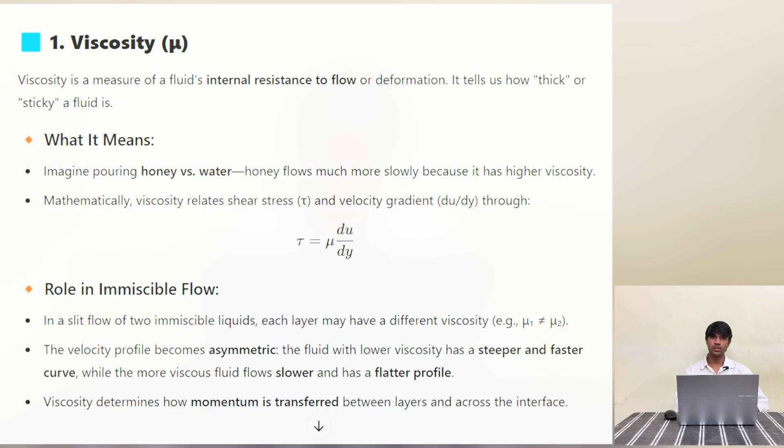So our second property is density. Density is the mass per unit volume of a fluid and plays a vital role in gravitational stability, pressure distribution and buoyancy. What does it mean? A denser fluid, mercury for example, contains more mass per unit volume compared to a lighter fluid, that is ethanol. It is a key factor in pressure variation with depth. P equals rho g h, where rho is the density of the fluid.

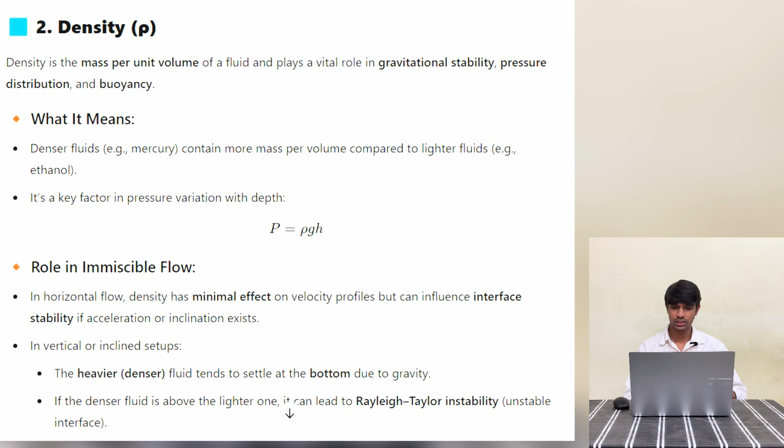Role in immiscible flow: in horizontal flow, density has a minimal effect on the velocity profile but can influence interface stability if acceleration or inclination exists. In a vertical or inclined setup, the heavier, denser fluid tends to settle at the bottom due to gravity. If the denser fluid is above the lighter one, it can lead to Rayleigh-Taylor instability, an unstable interface. Density differences are also key in phase separation and stratification.

Our third property is interfacial tension. Interfacial tension is a force per unit length that exists at the boundary between two immiscible fluids due to differences in molecular interaction. What does it mean? Just like surface tension at a liquid-air interface, interfacial tension exists at a liquid-liquid interface. It arises because molecules in each liquid prefer to stay with their own kind, causing a tension at the boundary. In immiscible fluids it helps maintain a sharp and smooth interface between two liquids. High interfacial tension resists mixing and deformation. Low interfacial tension allows more interface movement.

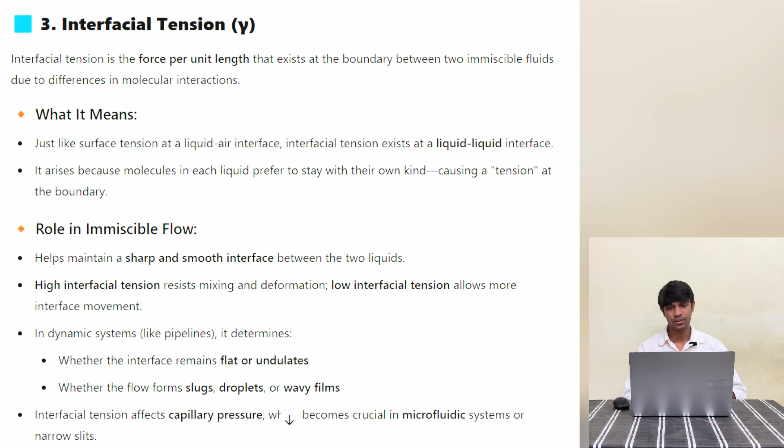In dynamic systems like pipelines, it determines whether the interface remains flat or undulates, whether the flow forms slugs, droplets, or wavy films. Interfacial tension affects capillary pressure, which becomes crucial in microfluidic systems or narrow slits. Our fourth property is miscibility versus immiscibility. This explains why some liquids mix while others do not, a key to understanding immiscible flow.

Miscibility: two liquids are miscible if they mix in all proportions to form a single homogeneous phase, that is ethanol and water. Molecular attraction between different species is strong enough to keep them together. Immiscibility: two liquids are immiscible if they do not mix and separate into two distinct phases, that is oil and water. This is caused by differences in polarity. Water is polar, oil is non-polar, no interaction, no attraction. The interface remains distinct with each liquid retaining its own properties.

Role in flow: immiscible fluids do not chemically interact, but they do mechanically. Momentum transfer happens via interfacial shear. Interface behavior is crucial. It can slip, deform, or remain stable. It determines how energy is distributed between layers. Understanding miscibility is important in designing separators, extractors, and two-phase reactors.

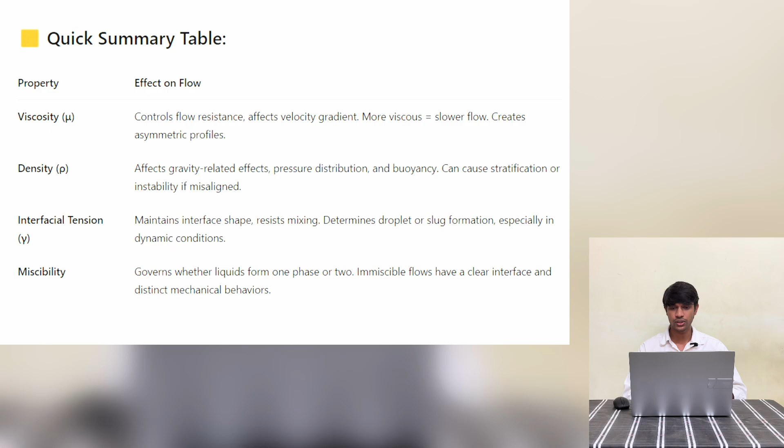So now let us summarize all this. Viscosity controls the flow resistance and velocity gradient; more viscous means slower flow, creating an asymmetric profile. Density affects gravity-related effects, pressure distribution and buoyancy, and can cause stratification and instability. Interfacial tension maintains interface shape, resists mixing, and determines droplet or slug formation, especially in dynamic conditions. Miscibility governs whether liquids form one phase or two; immiscible flows have a clear interface and distinct mechanical behavior.

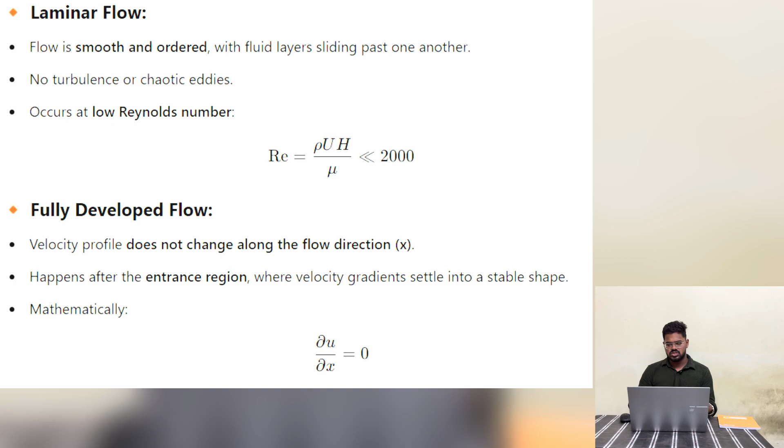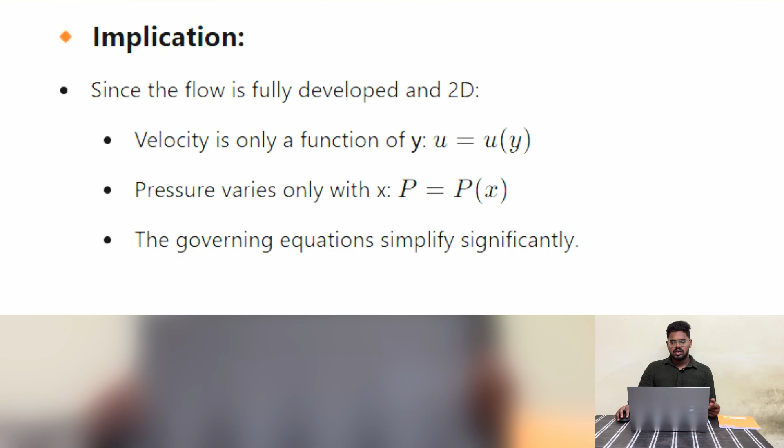Laminar flow: flow is smooth and ordered, with fluid layers sliding past one another. No turbulence or chaotic eddies occur at low Reynolds number. Reynolds number is rho u h over mu, which is less than 2000. Fully developed flow: the velocity profile does not change along the flow direction, x; this happens after the entrance region where the velocity gradient settles into a stable shape. Mathematically, del u by del x equals 0. Implications: since the flow is fully developed and 2D, velocity is only a function of y. u is a function of y. Pressure varies only with x. The governing equations simplify significantly.

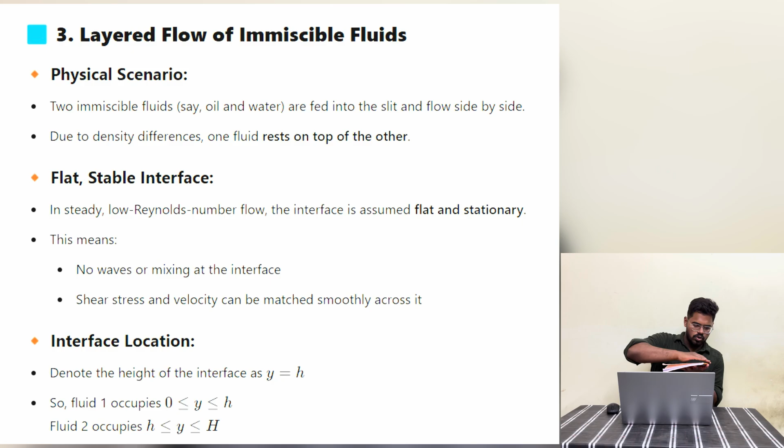Layered flow of immiscible liquid. Physical scenario: two immiscible liquids, say oil and water, are fed into the slit and flow side by side. For example, this is the plate, this is the thickness of the slit. So the oil and the water will flow in this direction, and they are flowing through this thickness towards the direction of this length.

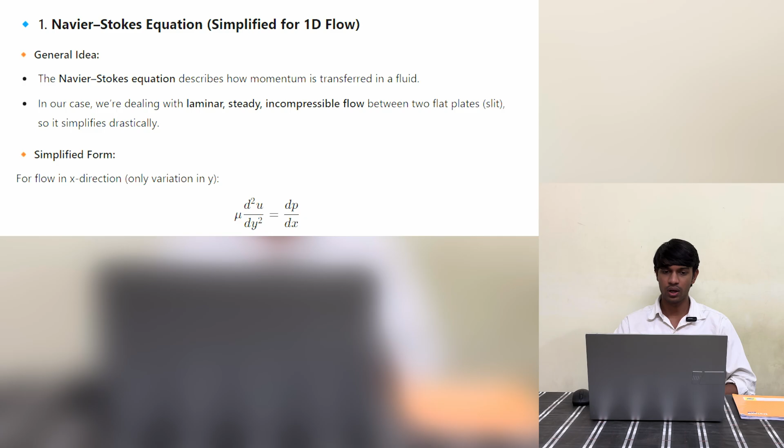In steady low Reynolds number flow, the interface is assumed flat and stationary. This means no waves or mixing at the interface. Shear stress and velocity can be matched smoothly across it. Now we will discuss the equation of motion. These equations are fundamental in transport phenomena. The first is the Navier-Stokes equation. The Navier-Stokes equation governs fluid motion, accounting for forces like pressure and viscosity. For our case, we simplify it using assumptions.

The first assumption is steady flow. Steady flow means there is no change in property of fluid with respect to time. The second assumption is laminar. The flow should be laminar: flow is smooth, there is no turbulence in the flow. The third assumption is fully developed. It means the velocity profile doesn't change in x direction. It means du by dx equals 0.

The fourth assumption is 2D slit. It means the variation is only in the y direction. And the fifth assumption is the fluid should be incompressible. Incompressible means constant density. What is the Navier-Stokes equation? The simplified equation is mu d²u by dy² equals dp by dx, where u is velocity in x direction, mu is dynamic viscosity, and dp by dx is a pressure gradient that drives the flow.

We can apply the Navier-Stokes equation in both fluids, the heavier fluid which is at the bottom, and the lighter fluid which is in the top layer. So it should be mu1 d²u1 by dy² equals dp by dx, and mu2 d²u2 by dy² equals dp by dx.

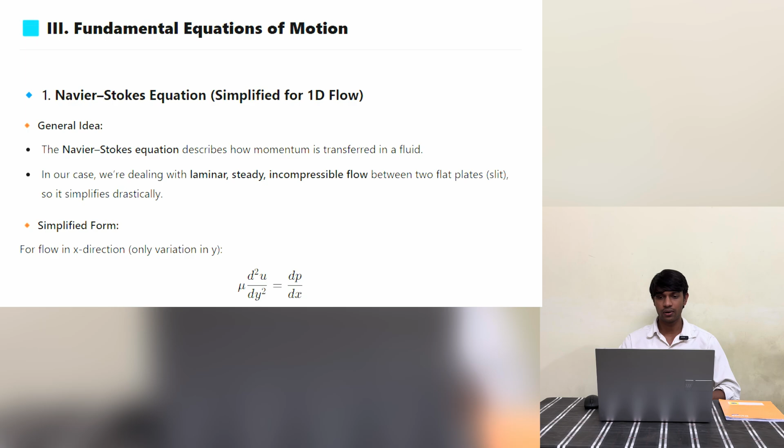Our second equation is the continuity equation. The continuity equation ensures mass is conserved in the flow. For an incompressible 2D flow, du by dx plus dv by dy equals 0. Simplification: since flow is fully developed, du by dx equals 0. So dv by dy equals 0, so v equals constant. What is the physical meaning of that continuity equation? In slit flow, the vertical velocity component v is 0. So fluid only moves in the x direction.

Third is boundary conditions. To solve the differential equation from Navier-Stokes, we need boundary conditions. These are physical constraints applied at the wall and interface. The first is no slip at wall. At a solid surface, fluid sticks. There is no relative motion between fluid and wall. It means u equals 0 at y equals 0 and at y equals H. Bottom plate y equals 0, fluid 1 sticks to wall. Top plate y equals H, fluid 2 sticks to wall.

The second boundary condition is continuity of velocity at interface. At the interface, when y equals h, both fluids must move at the same velocity. It means u1(h) equals u2(h). This ensures the interface doesn't tear or slip. Physically, the fluids drag each other at the boundary.

The third is continuity of shear stress at the interface. The tangential force, that is shear stress at the interface, must be the same on both sides. It means mu1 du1 by dy at y equals h equals mu2 du2 by dy at y equals h. This balances the viscous force across the interface. If shear was discontinuous, the fluid would separate or cause instability.

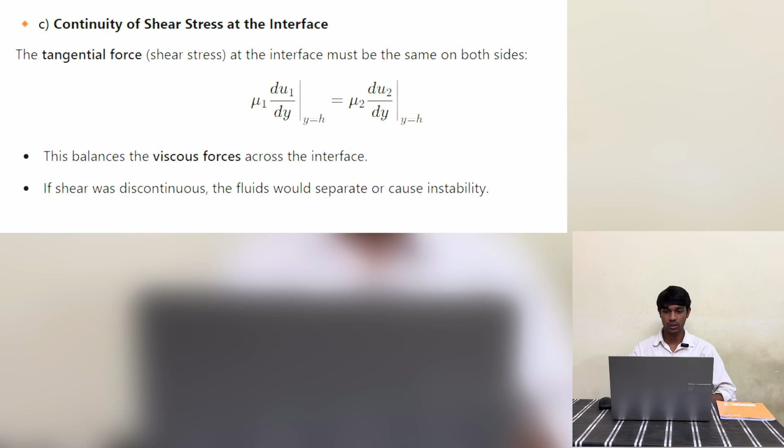The fourth is pressure gradient. Role: it is the driving force behind the flow, like tilting a pipe downhill or using a pump. Assumption: we consider a constant pressure gradient, that is dP by dx equals constant, same for both fluids since pressure is continuous across the interface. Now, why is this important? It links back to the Navier-Stokes equation and determines the shape and magnitude of the velocity profile.

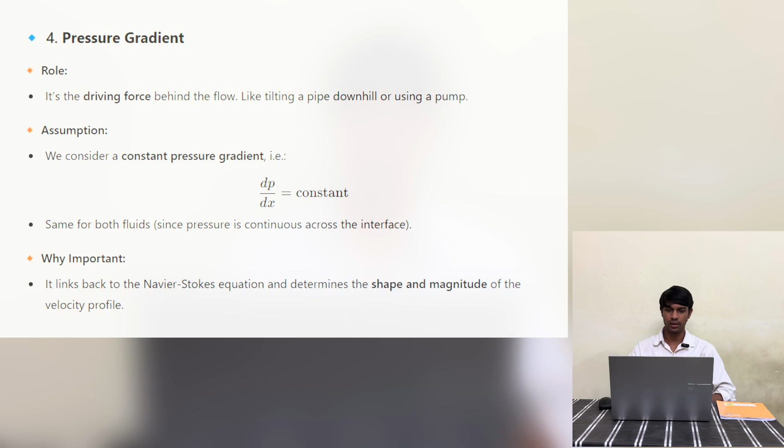So how do all these assumptions fit into the Navier-Stokes equation? Solve the simplified Navier-Stokes equation separately for each region. Integrate each twice. Get two parabolic profiles. Use four boundary conditions: no slip at bottom, no slip at top, continuity of velocity at interface, continuity of shear at interface. You will get the full velocity profile for both fluids, ready to analyze flow rate, interface behavior, etc.